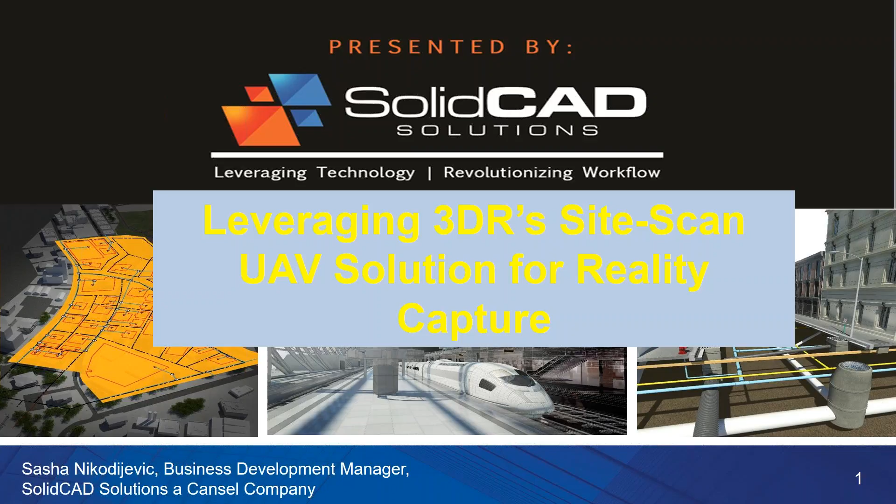So we're going to get going. As I mentioned, my name is Sasha Nikodijevic. I am with SolidCAD. Quick introduction to our company.

We began 28 years ago as an Autodesk partner. We have over 35 employees in Ontario, and we have the largest team of application specialists here. We are designated by Autodesk as a Platinum partner, their highest level of recognition in the industry, and we're also an Autodesk authorized training center.

In August of 2015, SolidCAD merged with Cansel's Ontario Autodesk Business Unit. This merged the two largest and strongest Canadian Autodesk teams together, providing our customers with a national partner. This also gave us a larger picture, letting us look at solutions not just around software, but the complete field-to-finish workflow, allowing our customers to optimize their data collection, processing, and complete workflow.

Cansel has 23 locations across Canada, over 400 employees, Canadian owned and operated, over 50 years in business, and is the largest Autodesk partner in Canada, through a number of acquisitions over the last decade as well as organic growth. As far as services we provide, it's a complete gamut.

We have a proven implementation methodology. We offer technical support by phone, on-site, or remote desktop. We offer training in a number of different flavors, everything from a custom course at your location, utilizing your data, covering specific topics to optimize your workflow. We also run public training classes in 11 labs across the country, and of course we offer online training as well, plus a complete host of consulting services.

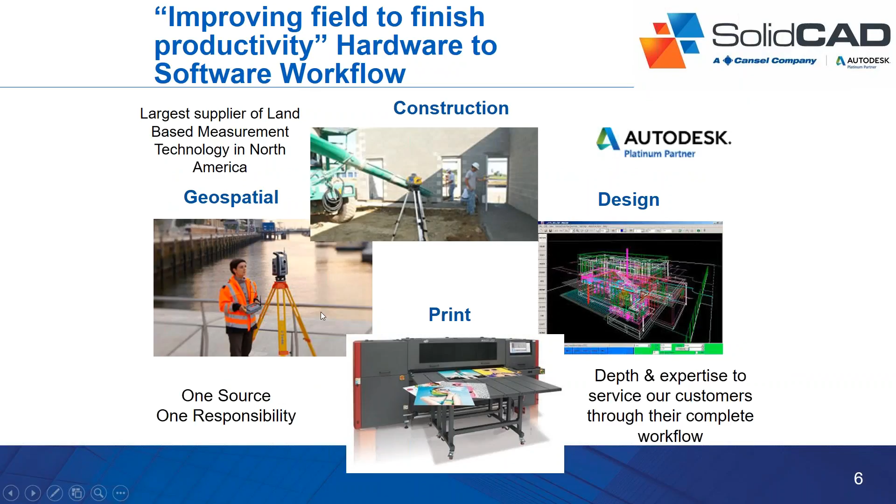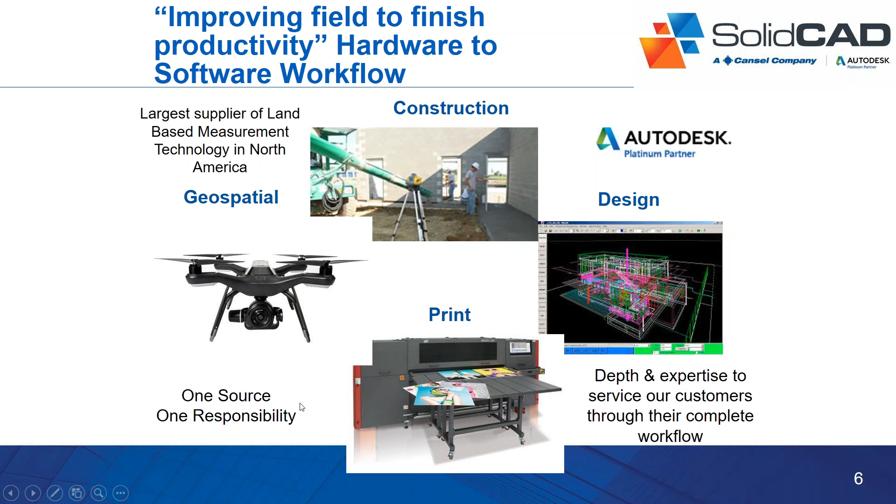Cansel is the largest supplier of land-based measurement technology in North America, and today we're excited about our new partnership with 3DR across Canada. Aside from hardware to collect data, we have Autodesk software and a number of other applications, and we're Canada's largest print supplier as well, of hardware, media, and supplies. So we really are one source, one responsibility.

So let's concentrate on the primary reason we're here: our exciting new partnership with 3DR, to specifically introduce the SiteScan solution. The tagline is press one button to measure your world so you can better manage it.

A quick introduction on who is 3DR. 3DR was founded in 2009, headquartered in Berkeley, California. 3DR is the largest North American drone firm, with approximately 750,000 UAVs or drone vehicles flying the 3DR code globally. You can see at the bottom a bit of a history on 3DR.

It was roughly in 2012 where the Pixhawk autopilot software was provided as open source to the industry, so there are other vendors utilizing 3DR's software technology. 3DR does combine hardware, software, and support to really make sure that you're successful.

In 2016, there was an Autodesk investment into 3DR, both financial and technical. So when we went to the marketplace to look at what type of UAV or drone made sense, the integration between the hardware that collects the data and the Autodesk software really made it the only viable and best solution in the marketplace. So we're really excited about the 3DR and Autodesk partnership.

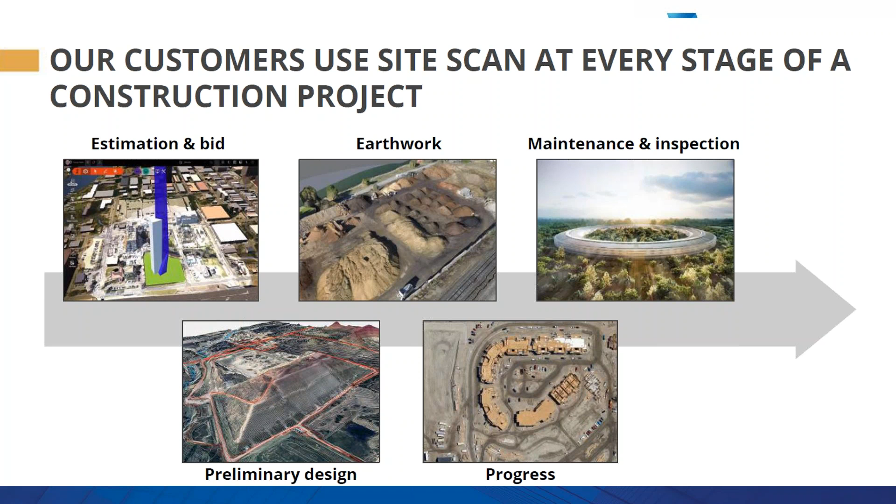Maintenance and inspection, of course, preliminary design, and then progress reports on a construction project. So digging into the volumes a little bit better as an example, use case one: better visibility into your business.

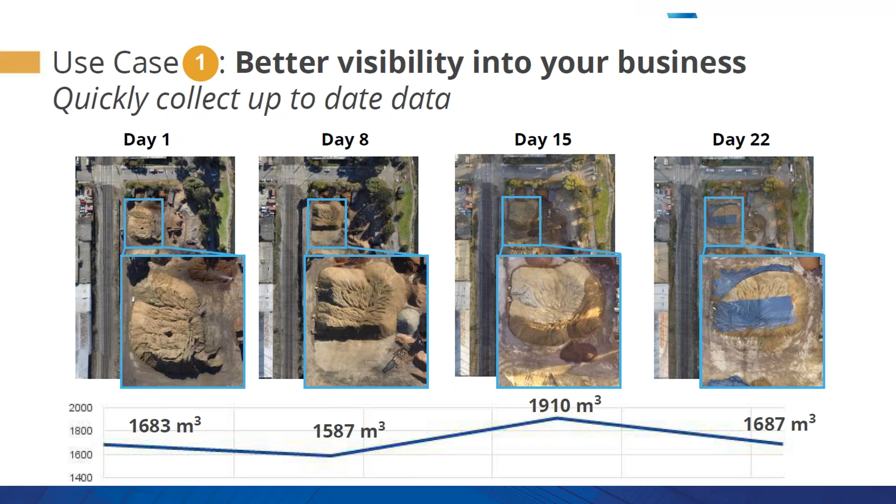This example just really shows that we're able to, with a UAV, quickly capture that data, and I will talk about accuracies when I get into the Q&A section. We're able to quickly capture accurate data. From there, we can take it into something like Autodesk ReMake, calculate a volume, or into something like Civil 3D and calculate a volume. So we're able to basically generate volumes just as accurately, more safely, and much more quickly than we would have in the past using traditional methods.

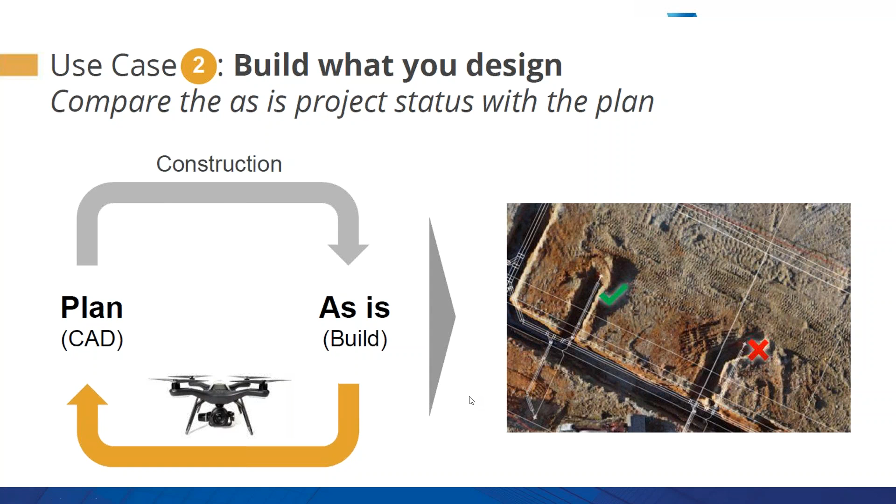Another use case: really the ability to manage your operations and clearly communicate progress.

So in terms of the bundle, what is it? What does it look like? Well, there's a couple of pieces to it, 3 pieces specifically. There's, of course, the drone. The Site Scan is really a proven UAV platform in the industry, the leader in North America. Attached to the bundle is a 20 megapixel APS-C Sony camera. With the battery and the camera, the complete unit is lighter than 2 kilograms.

So bundled with the hardware, there's an application that runs on your iPad tablet, on your iOS, and it's called Site Scan Field. And what this is used for is when we go on site, we bring up an image. It's all part of the application. We draw a rectangle, or it can be any kind of polygon shape.

We can set some settings in terms of how high we want to fly so that we know what type of imagery and resultant data we get. Once we do that, really it's that simple. We slide on the iPad and the drone will automatically take off. It'll follow the route it calculated based upon what we're looking at. It'll collect the imagery and it'll come back and land, and that's it.

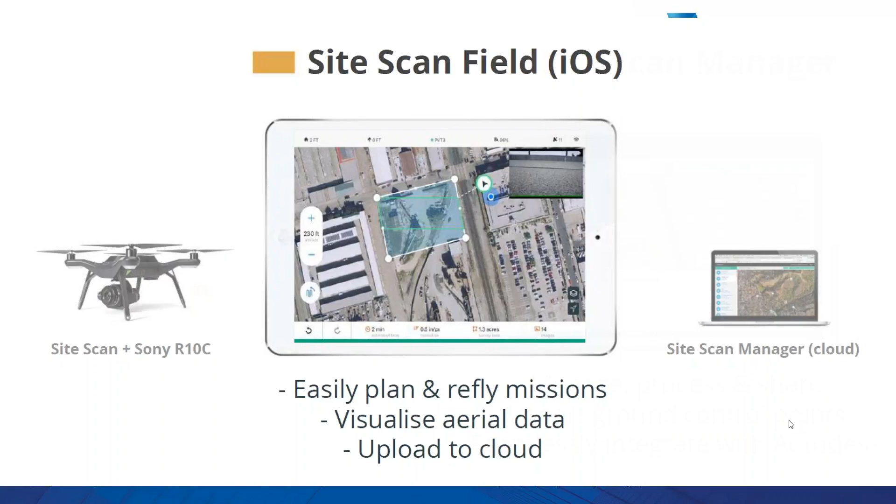It's that simple. I wish in a webinar I could show you it in operation, but there are some YouTube videos, so if you do contact me, I can send you some links so you can actually see it live in action. Once the drone comes back, we then upload the imagery to the Site Scan Manager, a cloud-based application that's part of the bundle. Inside the Site Scan Manager, we can see each individual image. We can remove some if we want. This is also where we can import ground control points to give our resultant data more accuracy.

And this is also where we really tell the software to go ahead and merge all these photos into one orthorectified TIFF image, as well as to calculate and provide us all the resultant data, the output formats. And of course from here, this is where we have our integration with Autodesk technology.

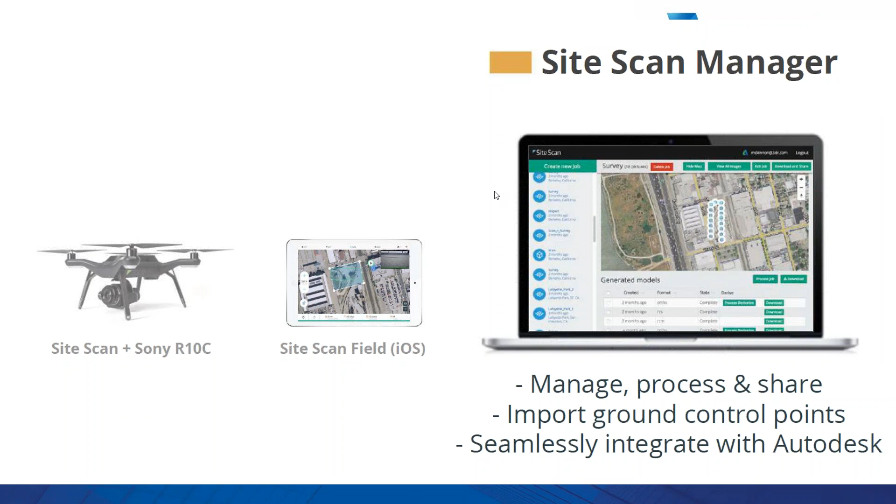So as far as output formats, these are the formats we get. We get 2 types of TIFF files, a geo-rectified ortho TIFF file, as well as a DEM TIFF file, a digital elevation model, and I'll be working with some of this live data in a few minutes.

The other data that we get, of course, are 3D point clouds. So we can automatically have generated for us an LAS file, which is a kind of an industry-neutral common format, or an RCS file, which is specific to Autodesk applications.

We can also receive 3D meshes and models, so depending upon what you're trying to do, you can get an RCM for Remake, Autodesk Remake, FBX or OBJ, which are 2 industry formats for 3D modeling. And then, of course, we can also generate contours as an output file as well.

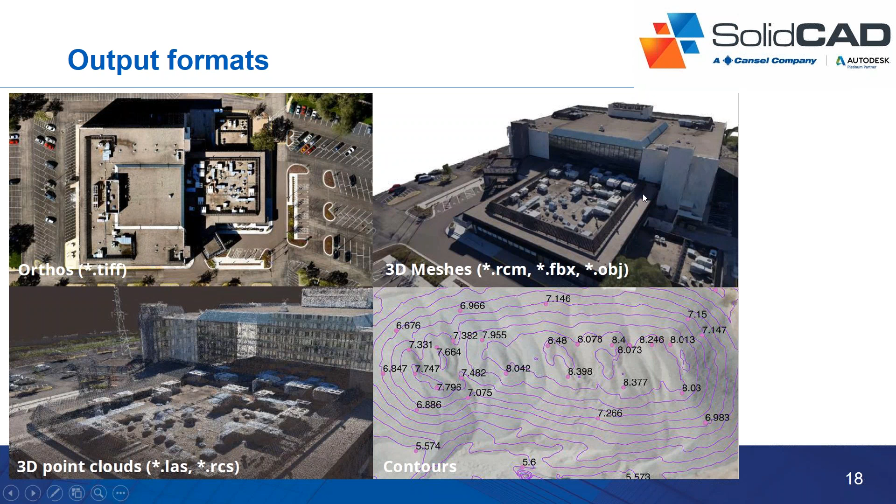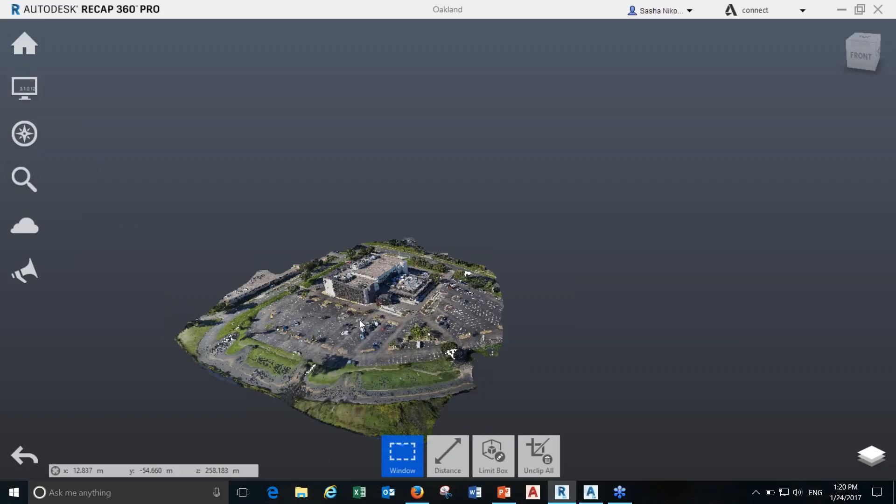Okay, so now I'm going to jump into a little bit of a demo. So the first one I'm going to start with is Autodesk Recap Pro. I'm just going to bring in an image. This image represents approximately 15 minutes of flight time with 110 photos. Obviously what we're looking at is a point cloud file.

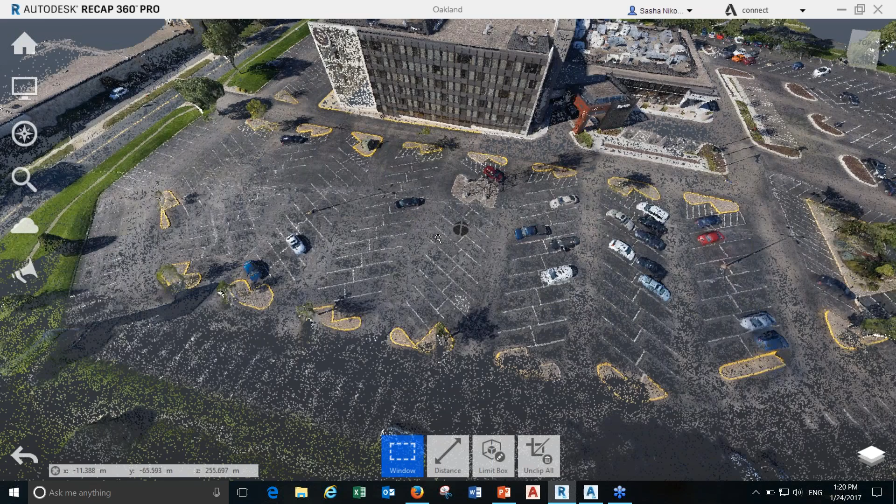So if I do zoom into an area, you will see that it is hundreds of thousands of three-dimensional points, all with their proper RGB value. So there's a lot of different uses why you might want to have data on a particular project. I probably don't need to explain to you why, but within Recap, there's a number of different things we can do.

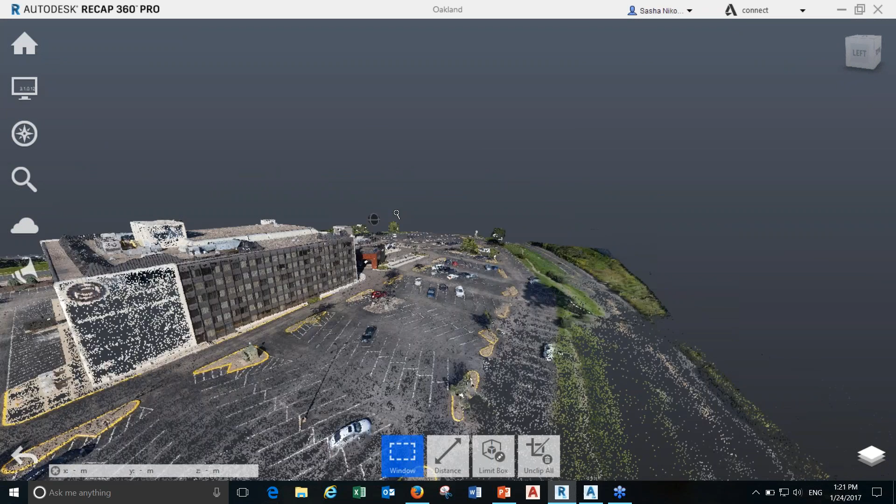For example, we may want to clean out some of the vegetation that we see in the model. So I can just simply zoom around. I could also bring this into InfraWorks and have some of the data classified, but again, based on time, I'm not doing that. So I'm just going to select that and say, okay, let's clear that. Did I do that? Select it again here.

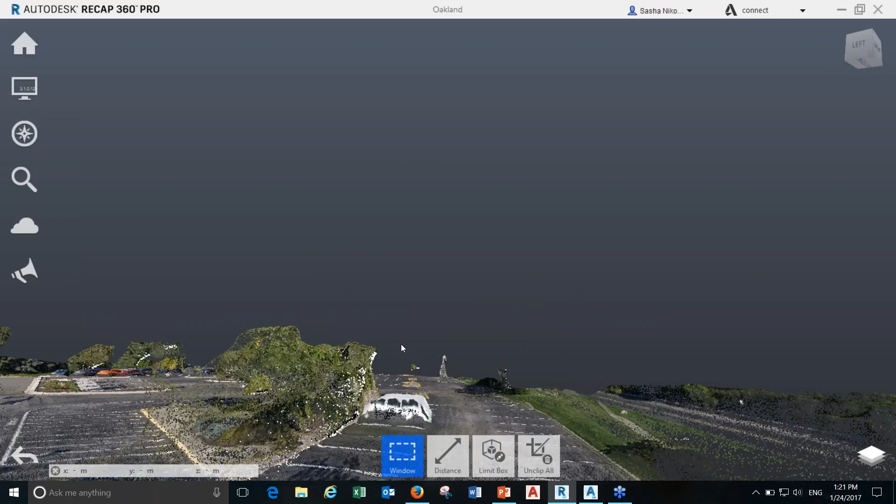And what we're going to do is we're going to clip inside, so we're going to get rid of that tree. So again, I can use Recap to do some filtering. I won't spend too much time on that.

We may be interested in some of the equipment on our roof up here. So one of the things I can do, as an example, is I can zoom into an area. I'm going to highlight this roof.

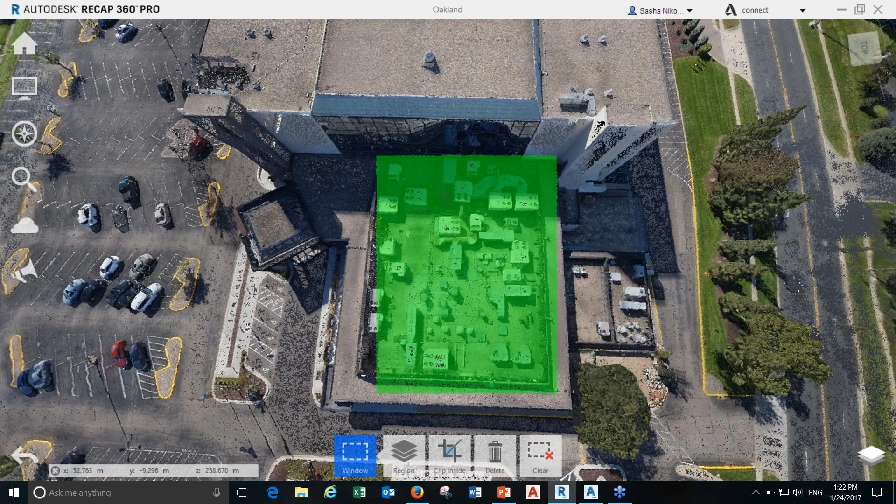And what I'm going to do is we're going to turn it into a region. So I'm going to say this is a new region, this is my, let's call it my lower roof. We'll hit OK. So now that we've identified that as a region, within my regions, I can simply say, okay...

I only want to look at the region that we just identified. So there we go, we're just looking at one. So this is kind of like creating almost layers of your data, if you will.

So now that we zoom in here, I could further clear information, or perhaps we simply want to be able to take measurements. So I'm going to go ahead and say, okay, what's the distance roughly from here to here? There we go. We can zoom into other areas.

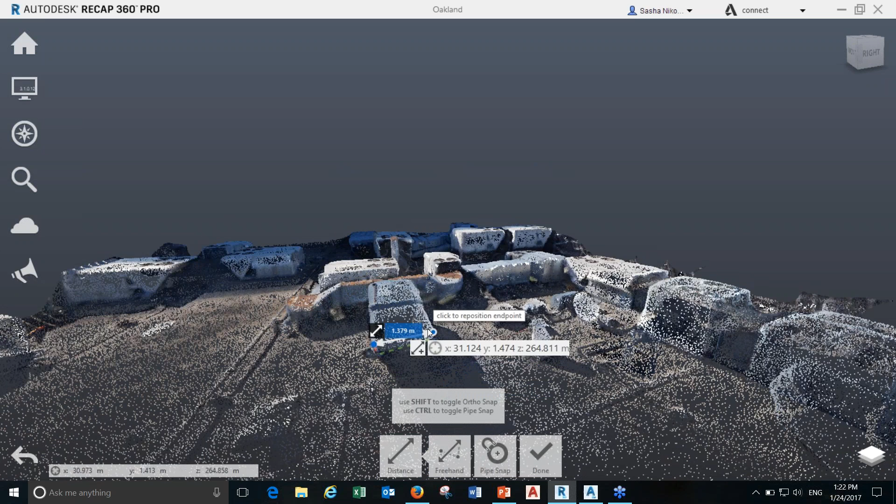We can leave those on our model. We can zoom in here. And obviously, the tighter I zoom in, the more accurate my pick will be. So it does take a little bit of zooming in if you want to select the right geometry.

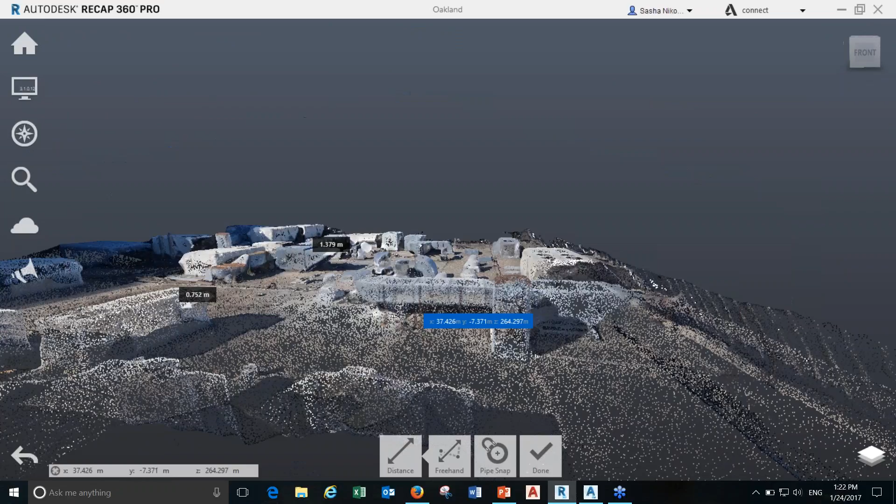So there we go, so we can simply use Recap 360 to pull off measurements. We can view our data with it. We can go back and turn on all of our data again, not just the roof deck that we did. So again, this has over 1 million points captured in, again, 15 minutes of flight time only.

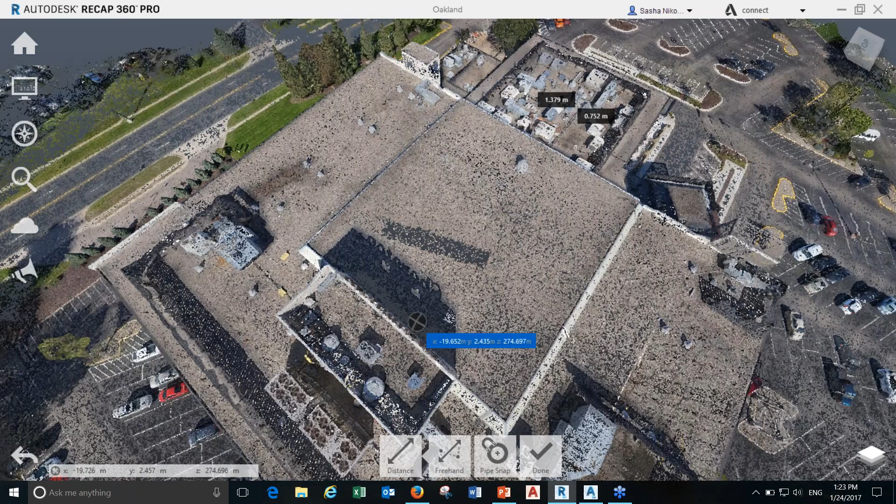Other things that we can do in Recap, but again, based on time, I do need to move on, so I'm going to just close this down.

And next we're going to move to Civil 3D. So I'm going to start off with actually AutoCAD Map. Some of you may only have AutoCAD Map, so I'm going to start with a couple of features that we can use in here. All right, so I'm going to open up my Map. Oh, there's my map workspace.

First thing I'm going to do is I'm going to connect to the ortho-rectified imagery. So I'm going to say connect to data. It looks like I've already got some things here. Let me just disconnect that and delete it. And delete and delete. Okay, so this is going to be my ortho.

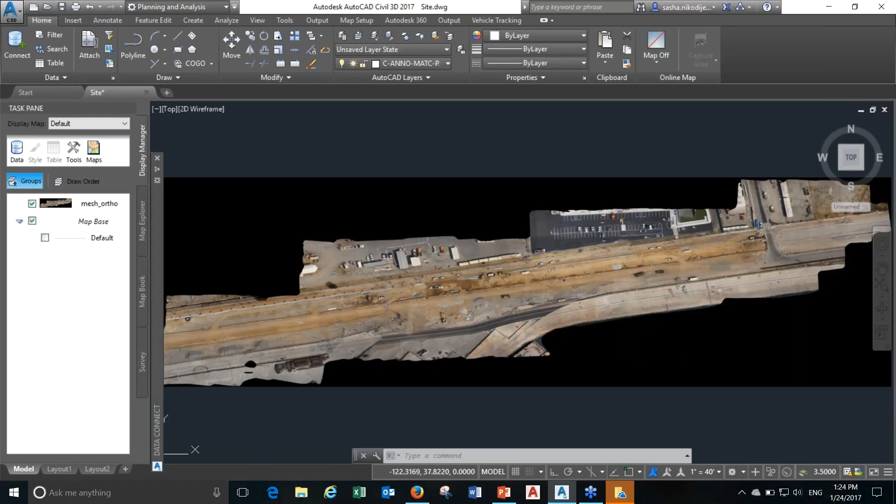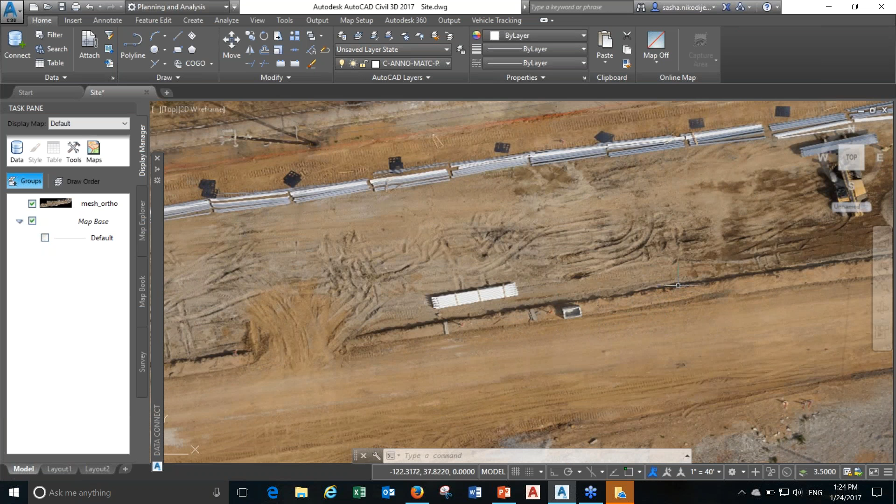So we're going to go ahead and select our ortho photo and connect. Everything is coordinate system based, so AutoCAD Map will apply transformations. This data set is about a 15-minute flight, 200 images, captured at a height of 60 meters, so fairly good resolution. We can fly as low as 100 feet to get much better imagery. So again, 15 minutes of flight time, then some cloud processing to stitch the imagery together. That's it - there's our image.

One of the other things I can also do is connect using that same method to my DEM file that gets generated for me. So there's my mesh DEM file. We're going to open that, connect to it, and add it to our map. And there's my digital elevation model. If I just change to a 3D view, we can see the data.

Now you will see some data for vehicles, and that may be where I go into Recap Pro and perform some cleanup operations. Okay, just go back to top view.

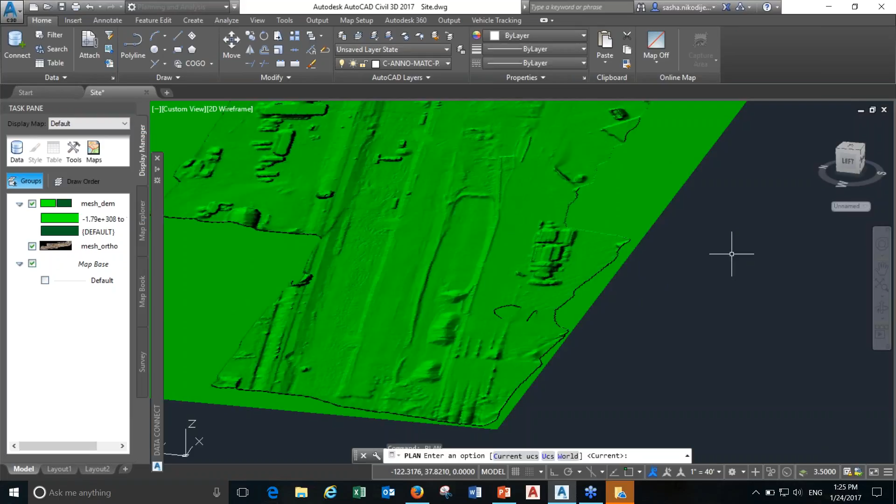In AutoCAD Map, there's a few other things we can do. We can go to Edit Style and perform a theme on the data. We can control our own elevation ranges, or specify a pre-done color map. I'll just go with that one, hit OK. Let's try again - all right, let's go to that one, hit OK. And of course, doing a live demo, it didn't do it for me.

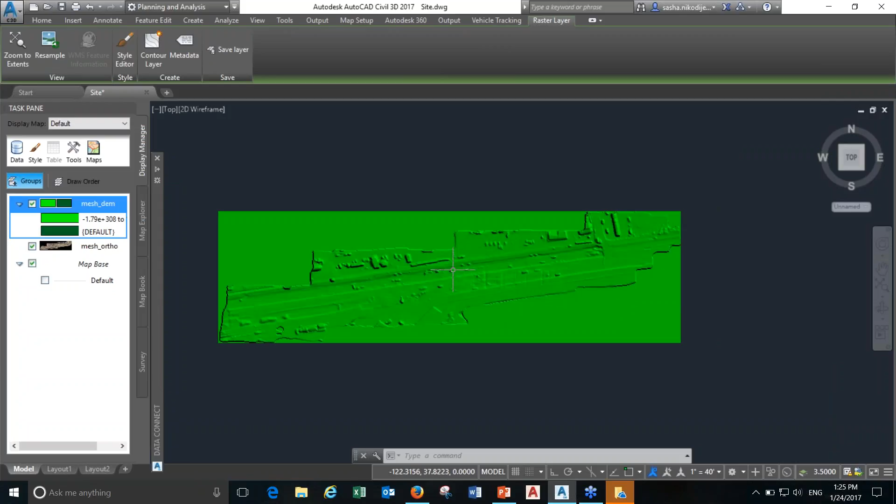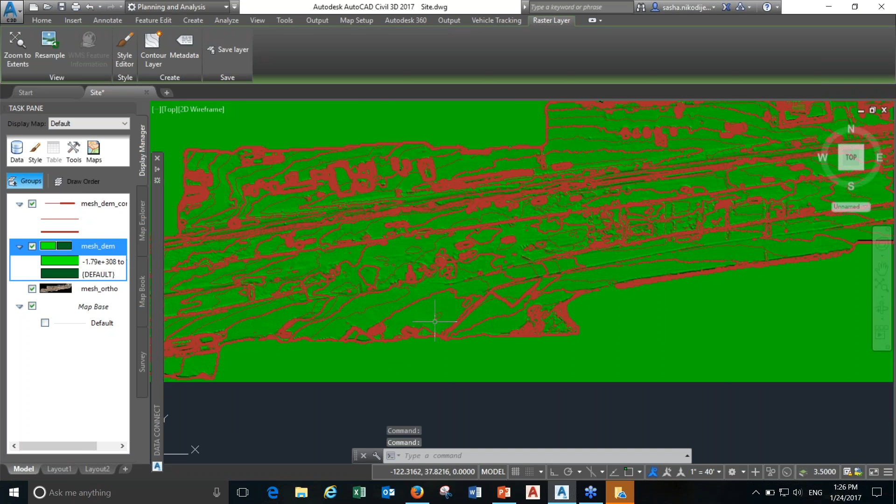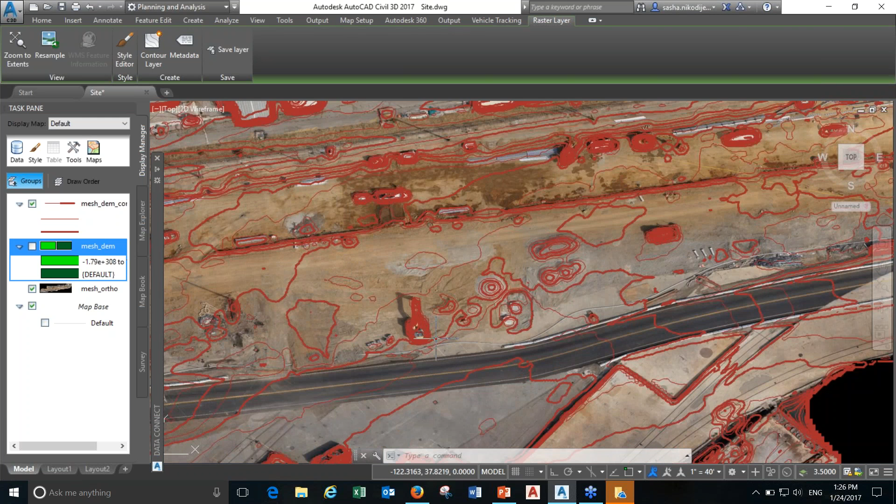Okay, that's okay, we'll keep going. If you are running AutoCAD Map, you do have the ability to create contours as well without going into Civil 3D. So let's do contours at a quarter meter, make 2 meter every major contour, hit OK. Very quickly we can generate some contour data from the information. We can turn our DEM off, and where we had some equipment we can see what happened - you'd want to clean up some of the data so we have only the ground model. But in a matter of minutes from that data, we can create this type of information.

Okay, from here I'm just going to delete a couple of pieces of information and move to Civil 3D. Just going to remove that layer as well. Perfect, so there's our ortho image. I'm just going to change my workspace back to a Civil 3D workspace.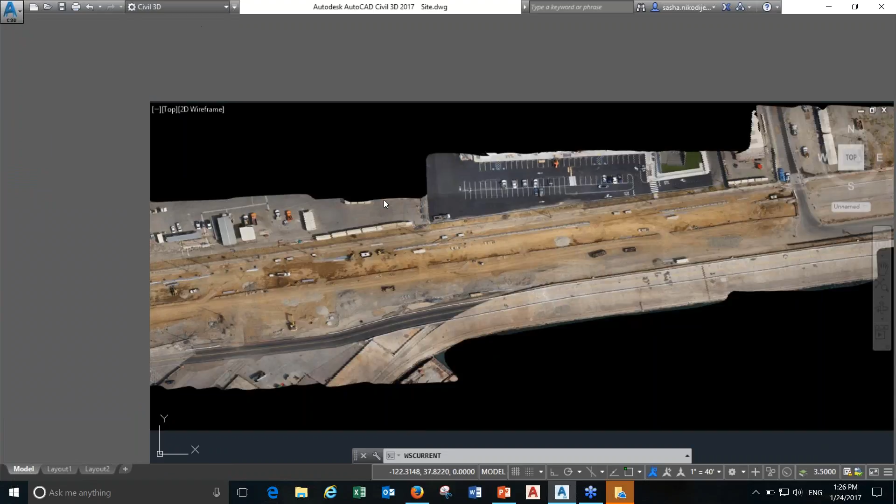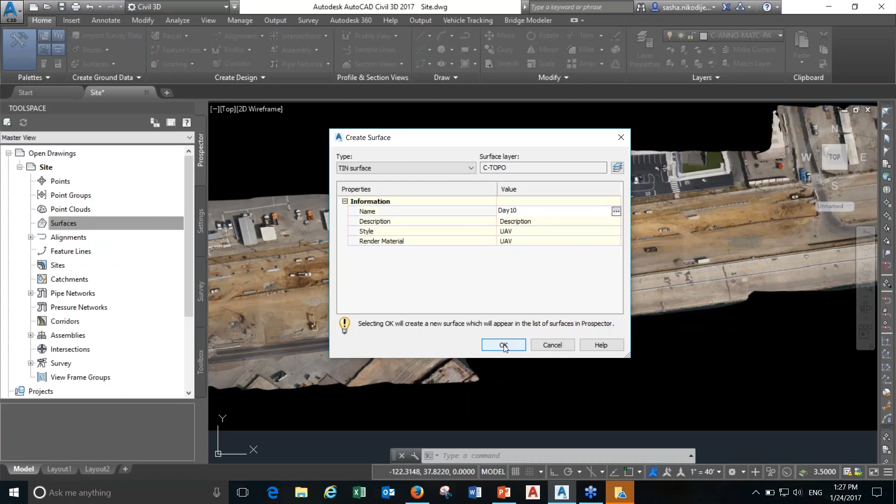Okay, under surfaces, I'm going to go ahead and create a new surface. This could be day 10 of the construction, and maybe we want to run volumes and compare them to the original ground or previous days' schedules. I'm just going to call this day 10. Under definition, we're going to use that same DEM file that we just did in AutoCAD Map to build my model. So there we go, we're going to pick our DEM file and hit OK.

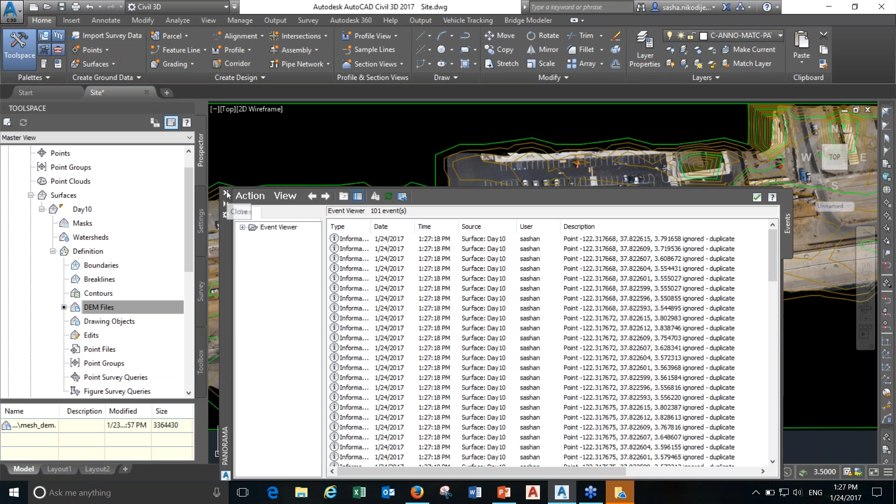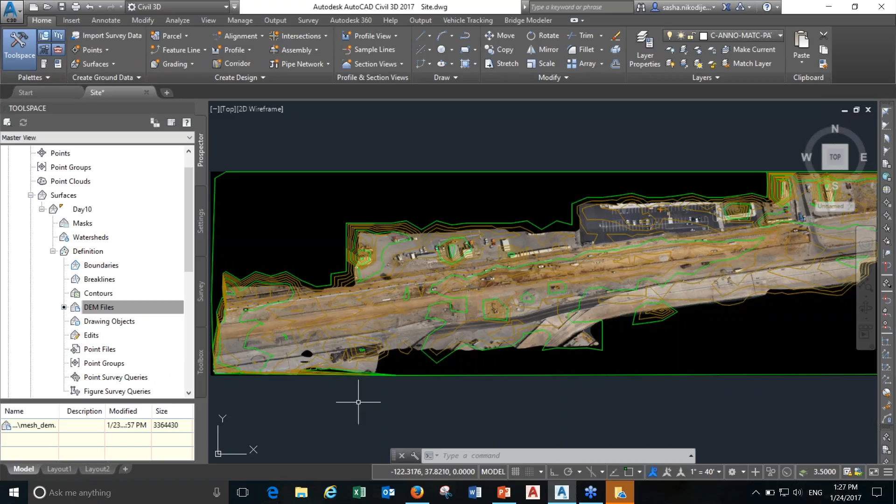And we have some duplicate points - that's okay, Civil 3D's ignored those. And you can see that we've already got contouring on our site from Civil 3D. Obviously from here I could run a volume and compare it - any of you that use Civil 3D know how to do that. We could generate sections, or use this as the basis for some kind of conceptual or preliminary design. So really quickly, that's just showing Civil 3D building a surface from that point cloud data.

I'm going to go back to our couple of slides here. Okay, so just really looking at the workflow again.

On site, we draw an area of interest, tell the drone to fly - it automatically takes off, captures, collects the data, and lands automatically. Depending on your site, anywhere from 15 to 30 minutes is all it should take to collect necessary information. From there, we upload the imagery to the cloud, and the site scan manager will tie all the imagery together. We could add ground control points to give further tightness to our horizontal and vertical accuracy. From there, we can also automatically generate not only the ortho-rectified TIFF, but the DEM file, the point cloud files, and several other formats that we saw earlier.

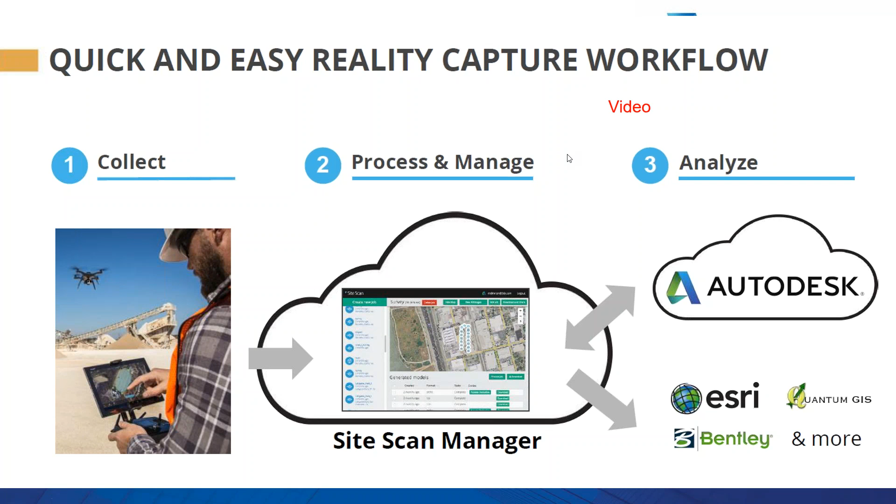So I want to get into some of the common questions we get. What are the output formats? We have an orthomosaic TIFF file, a digital elevation model, an RCM, OBJ, LAS, and FBX format.

Another question we typically get: can I do several jobs and geotag the images later? Yes. Also, a new feature recently added is the multi-battery flight option. If my battery isn't going to last the required length of time, the UAV will automatically come back, land, let me swap out the battery, and then carry on its mission. I can also save missions for future flights so I can collect and capture the same data.

What's the output resolution? We basically get 0.8 centimeter ground sampling distance at 100 feet. What's the minimum maximum area I can survey? 80 acres, 32 hectares is the maximum.

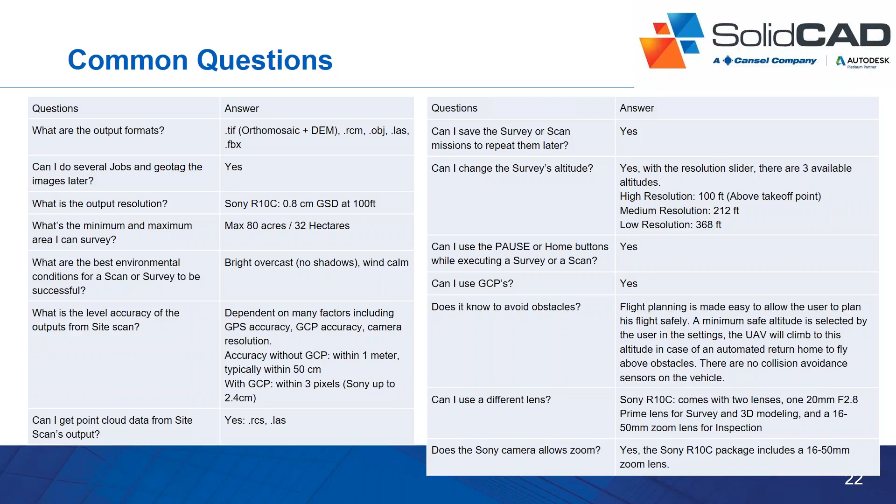So really, some key takeaways: drones are easy to fly, and everyone will be able to fly one commercially, especially based on the weight of the solution we have. Reality capture with UAVs will be necessary to win projects and improve efficiencies across sites in the very near future. UAVs and drones are not a fad, they will be a staple in everybody's toolkit. And SiteScan is really the only complete platform that includes hardware, software, and support to make sure you're successful.

At SolidCAD, we're very excited by this announcement. We've already had 1 test flight that was very successful in terms of its safety and data capture. This was done just before snow hit the ground here in Toronto. We're very excited to launch this nationally.